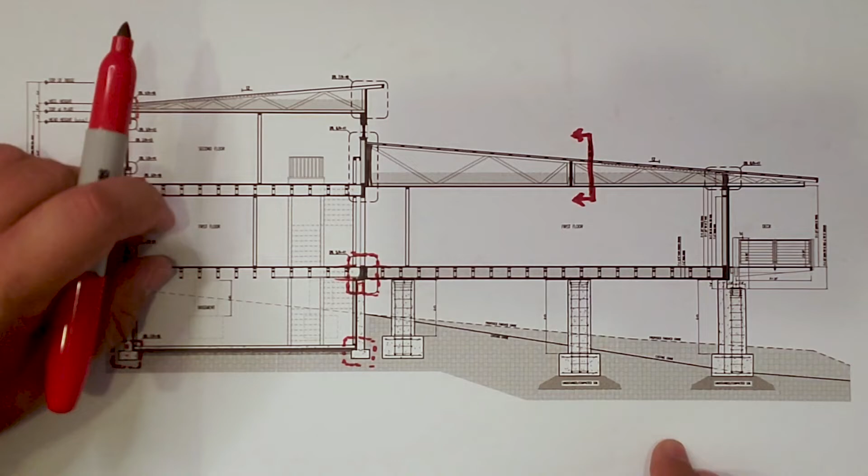All right, so we got our section out. Remember we talked about the footing details, the water table, second floor bay and transition. Well, today we talk about that roof rake detail. And the roof rake detail is actually parallel to the section that is cut here, not perpendicular like the details that we have previously looked at. So that being said, you would show that as a section cut, and we would show that coming up.

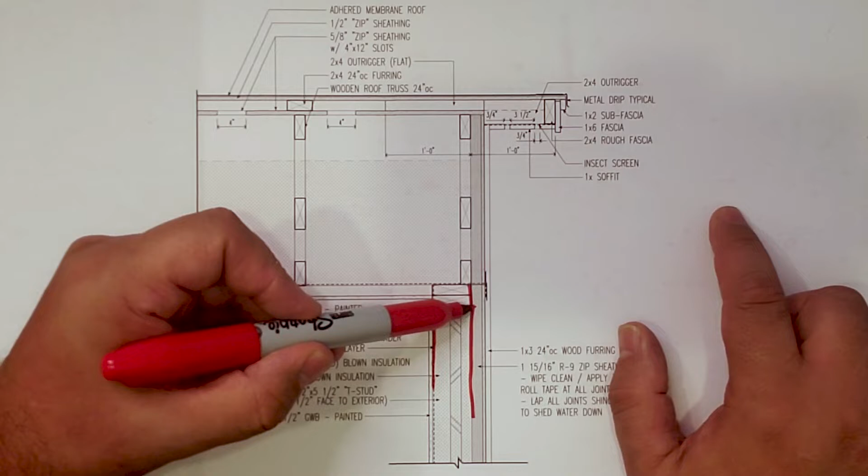So let's take a look at that detail. Register our drawing there. Make sure we're good to go. All right, so location. There's our top of the wall. There's our double top plate. There's our T-stud. And that's filled with our Havelock wool insulation in there.

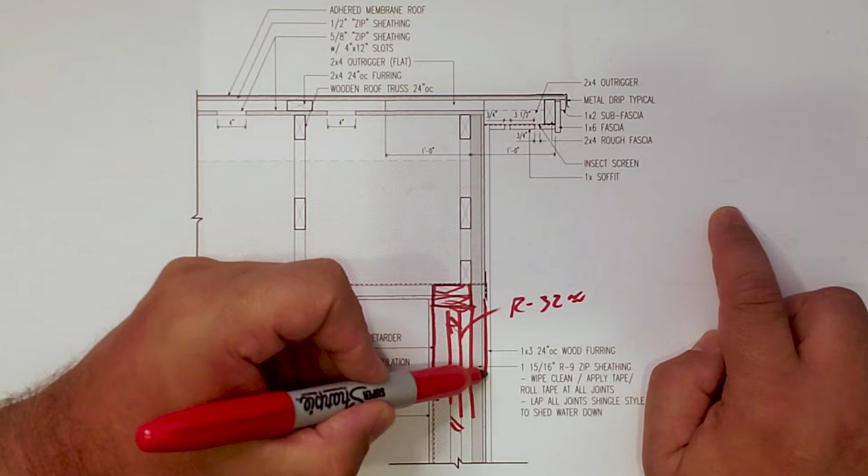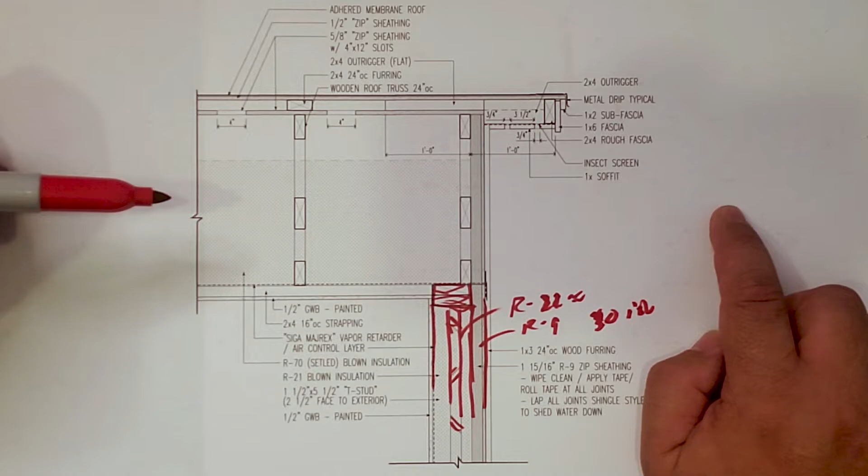So that's roughly our 32-ish. And then we have our Zip R9 on the outside of that. So that gives us roughly, or I'm sorry, the Havelock wool's 21-ish, so that's going to give us roughly a 30-ish wall frame. Notice that the Zip R9 goes all the way up to the top here on the detail.

And when you're dealing with a vented roof, there's basically two aspects. One, you want to limit the amount of moisture load, right? So we have a bunch of moisture that's trying to migrate up there, and we want to limit that. In this house, what we did is we have a Zehnder that handles the RH down here in the house via dilution through distribution of outside air through the ventilation system. So we control that. So we're limiting the amount of moisture that we put in the house to begin with.

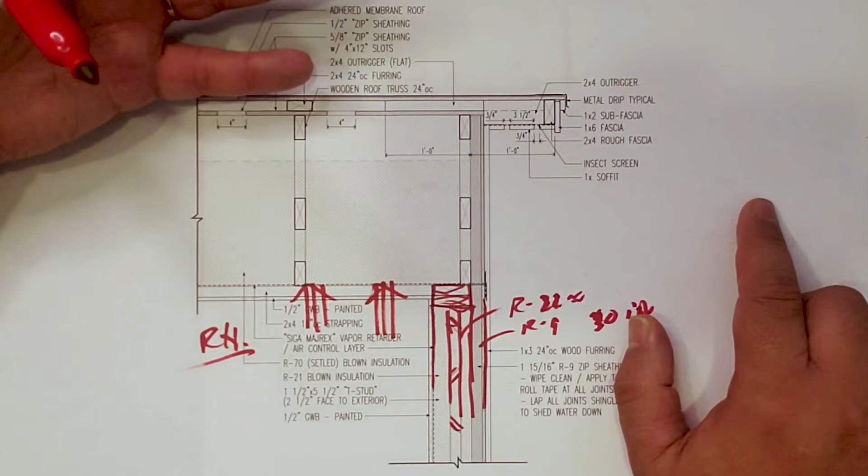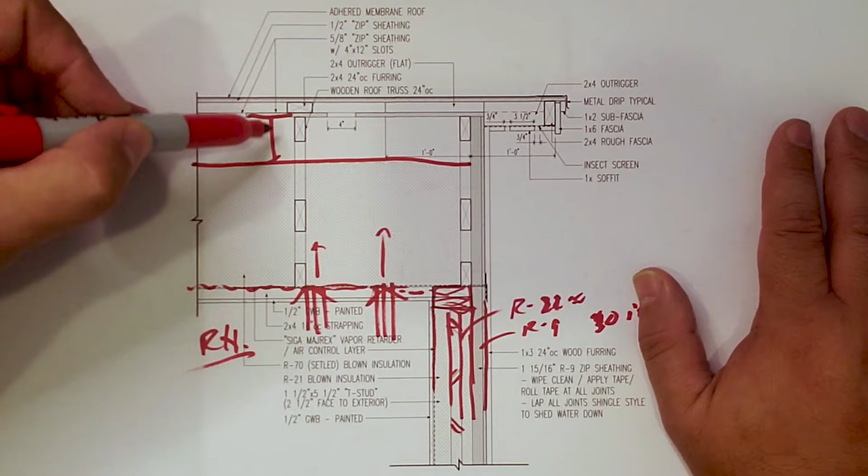And then we have our Siga Majrex vapor retarder there that goes up. And that basically seals off or retards moisture migration up into the attic space. And then you can see here where our insulation stops, and then we have our vented space. And then if we continue this, this would be in elevation all the way up to the roof structure there. And then we have that vent at the top of the roof there that provides exfiltration to the air that we infiltrate into the system.

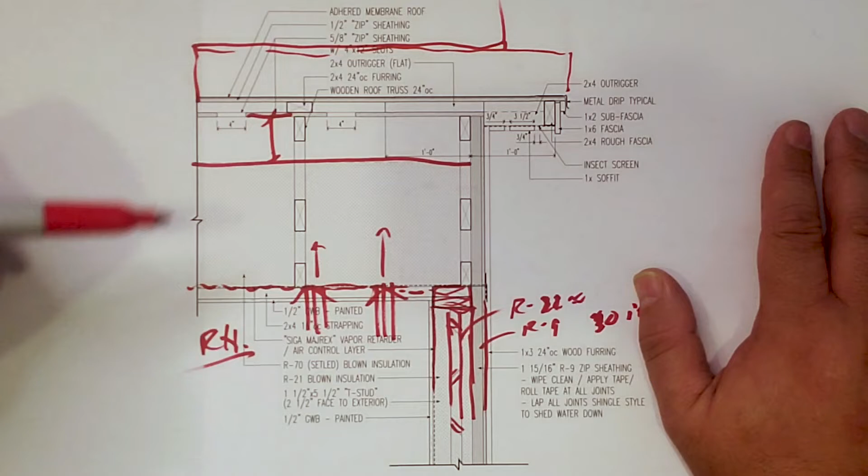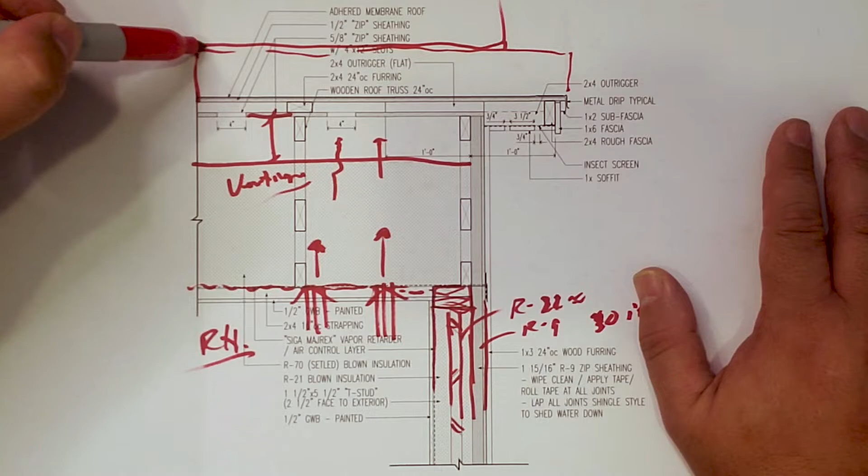So that being said, we have moisture going up. The other way we deal with the air is by venting it, right? What we can't control via the Zehnder or the Siga, we allow that moisture to migrate up into this vent space. And that vent space is, if you remember in the section, it's connected all the way back to the soffit of that deck area. And as it moves towards the high point here, it gets increasingly larger. Right, so that we have that air going out there and we have air going in here.

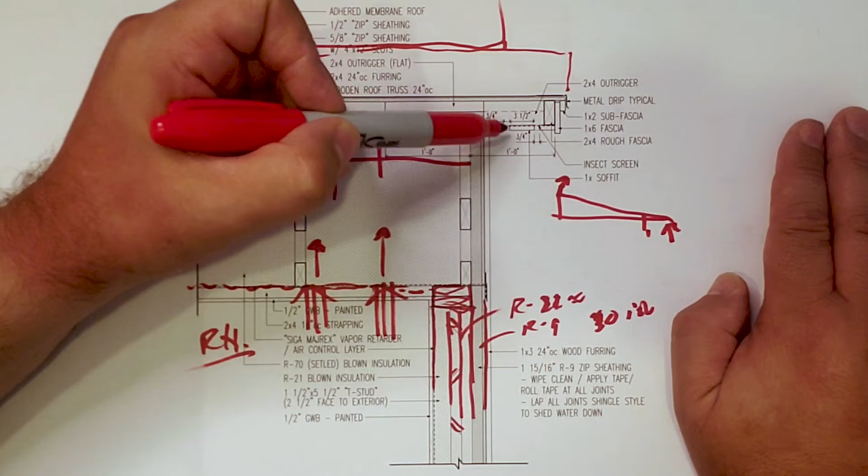But one of the things that I did to add to the success of the roof was, not only did we have that 10 feet of venting at the bottom, but I introduced air at the rake here so that we can get air into our system here, and obviously

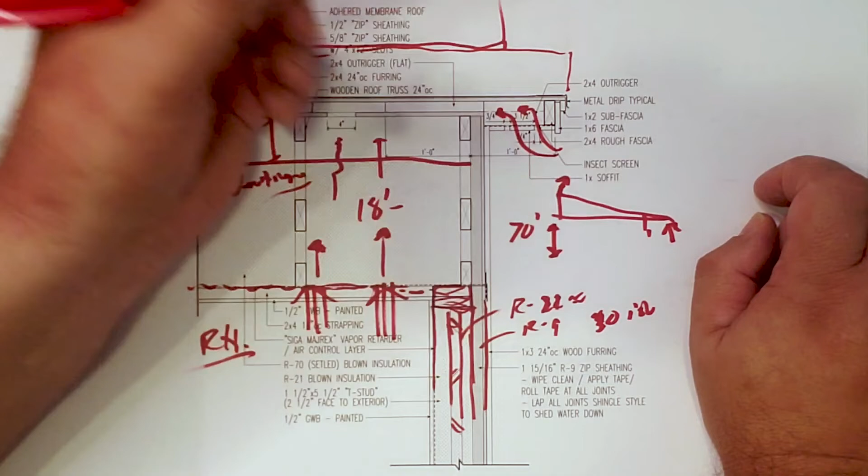across the way on the other side. Our building's only 18 feet wide, so that gives us a pretty narrow perspective, and it's, I don't know, on the order of 70 feet long. So it's well over 3 times the length than it is wide. So we have an opportunity there to really jam a lot of air into that system to handle the very little moisture that we are allowing to get into that system.

So the way we did it, roof trusses, we have our 5/8 inch ZIP here, but notice I called for these 4-inch strips to be cut, and those are 4 by 12. And you'll see those in the slideshow that get cut up the roof. And that allows this vented air to get into what I would consider the superhighway of the system. That's that 1.5-inch vented channel via these 2x4s that are aligned with the trusses.

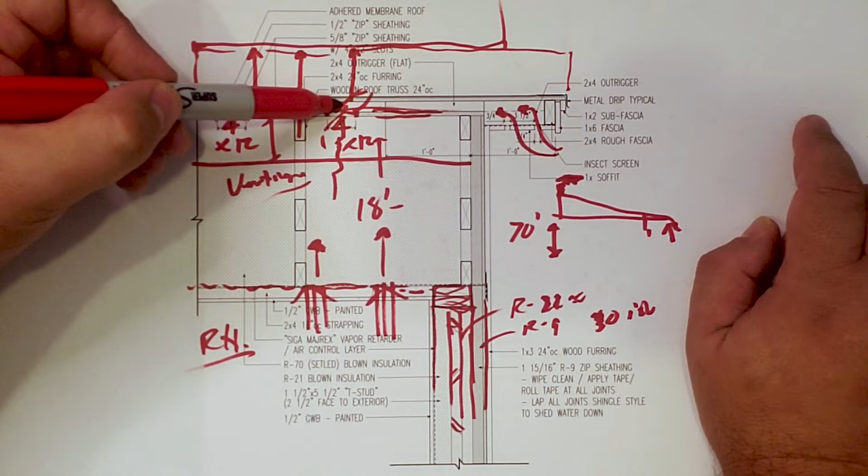And that air goes all the way up to the top and comes out that vent here that we were speaking of. So we get that slow migration into this air. This moisture-laden air jumps up and has the ability to basically get on that superhighway. That superhighway gets supercharged by introducing air on the rakes.

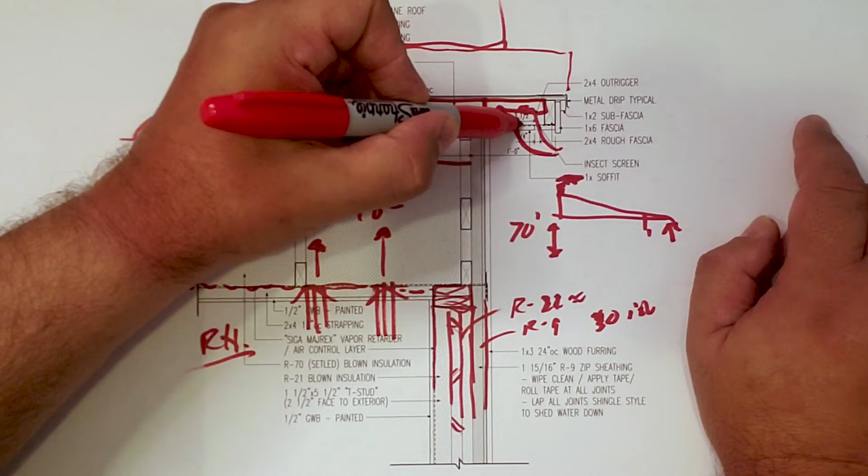And what we did there was we had a 2x4 on the flat that came back about 18 inches. And then from the sheathing out, we had a 2x4 on edge to build that with a 2x4 rough fascia that acts as a rail that goes up the system. And then we applied our soffit material underneath that. But that allows us to really just flood that upper venting channel with air from basically all 3 sides. You're getting it from here, but you're introducing that air all along the roof, along those rakes.

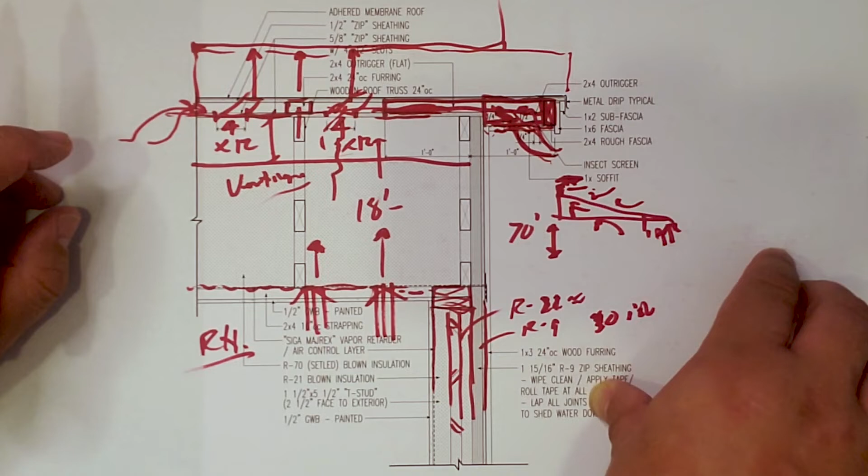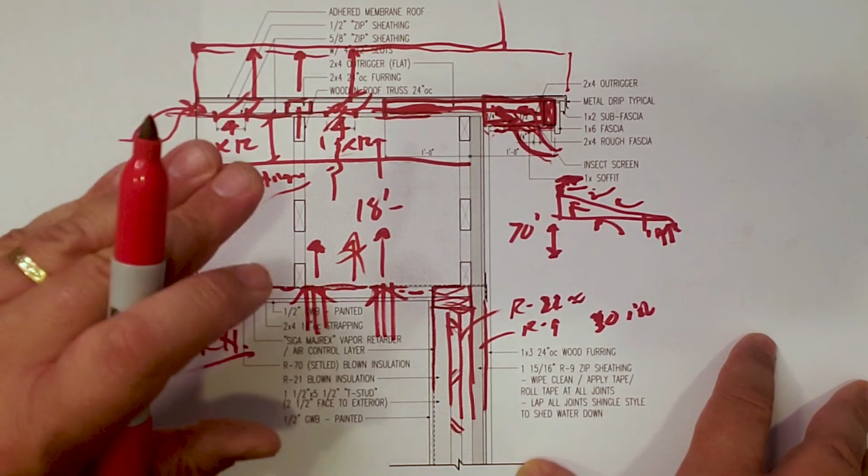So, putting the roof in a position for success, again, we limit the amount of moisture that gets into the roof system, and what does get in, we flush out heartily by providing as much ventilation air as we can. And remember this is a 1 in 12 roof, and a lot of people would say, oh, you can't vent anything under a 3 in 12. And I felt confident that if we put enough air into the system that we could.

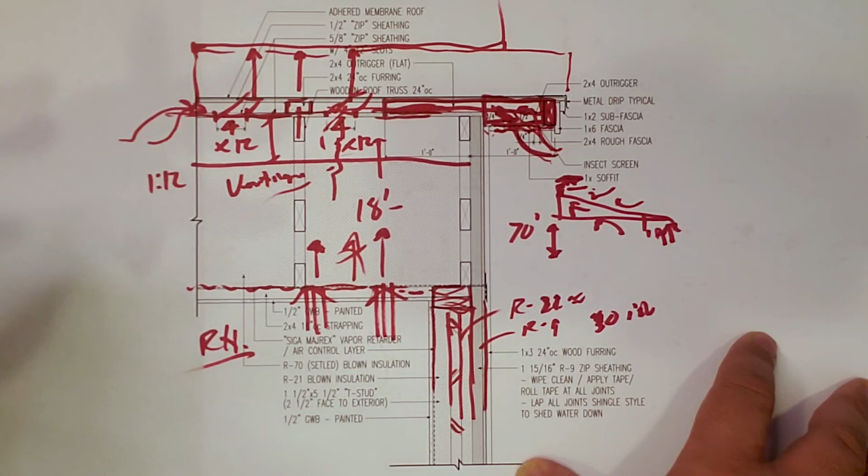And in fact, my good friend Peter Yost, part of the Unbuild It podcast, was there with some of his tools, and we actually injected a bunch of theatrical fog into the soffit, not the rakes, just the soffit, to see where it would go. And in the 32-foot roof out at the outbuilding there, we bled that smoke in, I think, around 28 seconds. And it was streaming out. We weren't even ready. We had to reset everything to take a video because we weren't expecting it to vent that quick. So this roof actually performs exceptionally well.

And it looks good. It's got that nice thin profile running up the rakes there. And, yeah, just as we intended. As always, it performs as good as it looks.